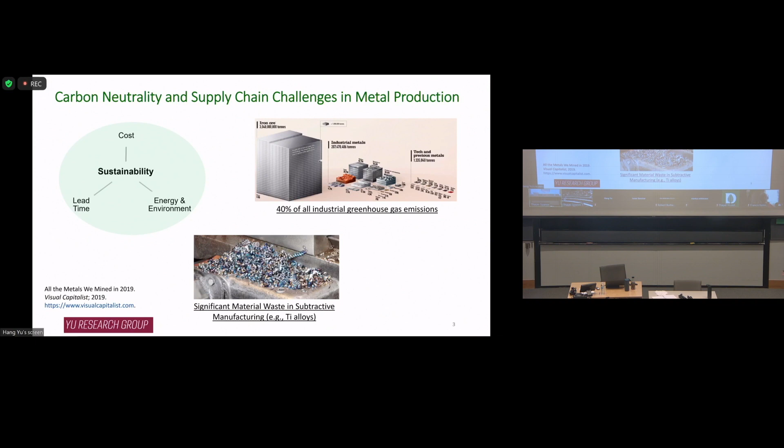Achieving those goals is not trivial at all. Metal production accounts for 40% of all industrial greenhouse gas emissions. And metal production can lead to significant material waste when you machine the material into the shape you want. One extreme example is titanium alloys. Folks at Boeing and Lockheed Martin start with billets of titanium alloy and machine them into the final parts.

During this process, up to 80-90% of the material can become waste. And metal production can also take a long time because we have insufficient supply of large dies for forging and castings. This can take up to a couple of years.

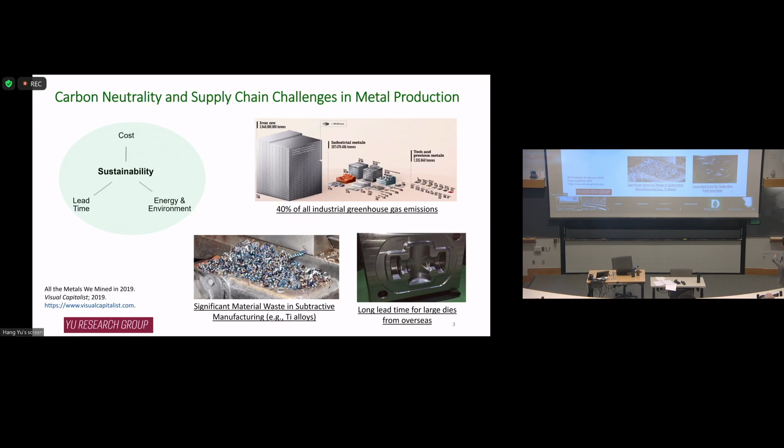So how can we address those problems? Let's look at the entire manufacturing chain of metals. You start from ores, you do extraction, purification, refining. You melt material, you add alloying elements, you cast them into ingots, you do thermomechanical processing like rolling, forging, extrusion, and then you do machining to get the final shape you want.

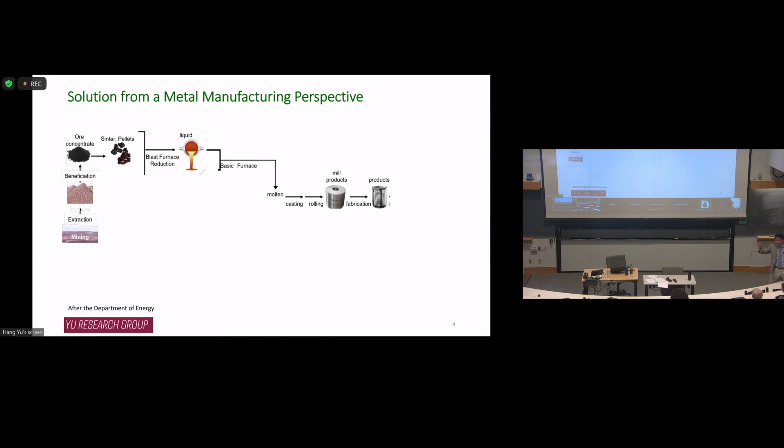This is a long manufacturing chain, but we can roughly divide it into two parts. The first part is primary processing and extraction—for folks from the field of mining, extractive metallurgy, chemical metallurgy, this is their focus. The second part is manufacturing, and for my group, as material engineers or mechanical engineers, we're more interested in the manufacturing side.

So we ask ourselves the question: what can we do to improve the sustainability of metal production from the manufacturing side? Look at this current manufacturing strategy—we have multiple manufacturing steps, a lot of energy consumption, and a lot of material waste.

So what if we can have another manufacturing strategy so we can simplify the manufacturing steps and reduce the material waste? What if we can promote decentralized and localized production of components, so we don't have to rely on more centralized, large manufacturing hubs? What if we can enable repair and remanufacturing, so when we have a large component with local damage, we don't have to throw it away—we can just do a repair, restore the geometry and properties, and extend the lifetime of the component? All these bullet points point to a new manufacturing paradigm: additive manufacturing.

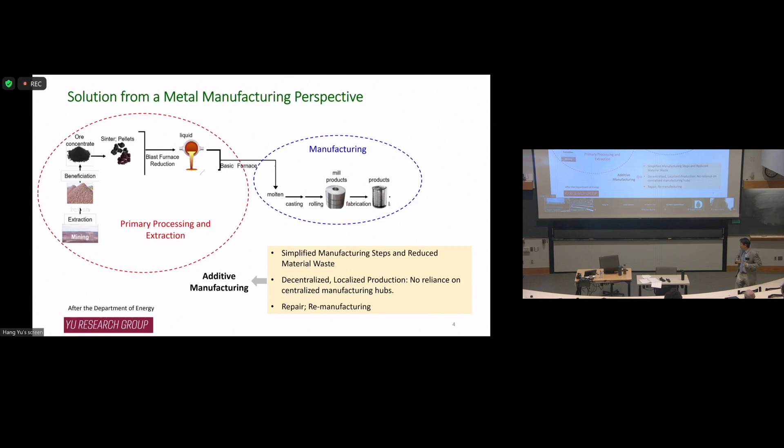So what is additive manufacturing? Traditionally, we do so-called subtractive manufacturing—you start with a big chunk of material, like a billet, and you remove material by machining to get a final shape.

Additive manufacturing is the opposite: you use building blocks, you add material, either layer by layer or voxel by voxel, to get a final shape. According to ASTM or ISO, there are 7 technologies for additive manufacturing, and based on those technologies, almost all types of material can be fabricated.

If you're interested in polymers, fused deposition modeling is very good for thermoplastics. And if you have a photocurable polymer, you can use material jetting or stereolithography.

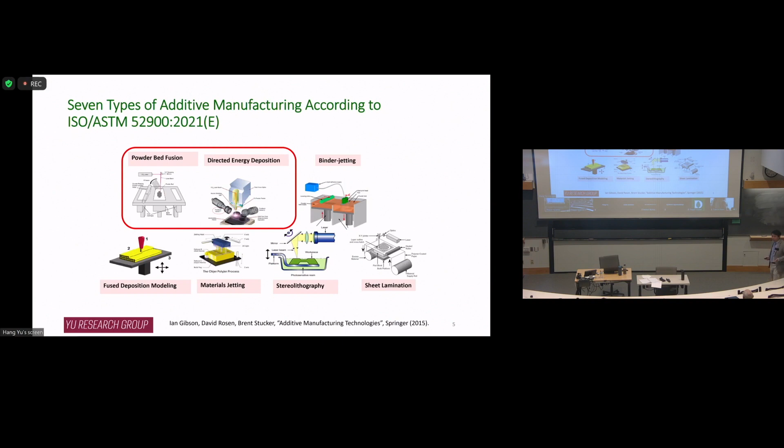If you want to print metals these days, I would say the most popular or mainstream approaches are the top two: powder bed fusion and directed energy deposition. Those two processes can be categorized under a common name, beam-based or fusion-based metal additive manufacturing.

In these cases, you have a high-energy beam—could be a laser beam, could be an electron beam—and you have a feedstock. Your high-energy beam selectively melts your feedstock, and as the beam moves away, your molten pool solidifies. The initial powder bonds together to become a solidified track, so your material pattern is based on the traveling path of your laser or electron beam. That's why it's called a beam-based process.

I have two examples here, small animations showing what's going on. The first one is powder bed fusion. That's a layer of powder, and you apply a laser—you can generate a pattern in this layer. Then you lay out another layer of powder and repeat this process with a different material pattern, depending on your G-code. Repeating this process layer by layer, you can make 3D components.

Of course, the material pattern in each layer does not need to be the same—that's why you make 3D components. But that's a very simple illustration. So this is powder bed fusion: you have a powder bed, and you apply a laser beam to generate a material pattern.

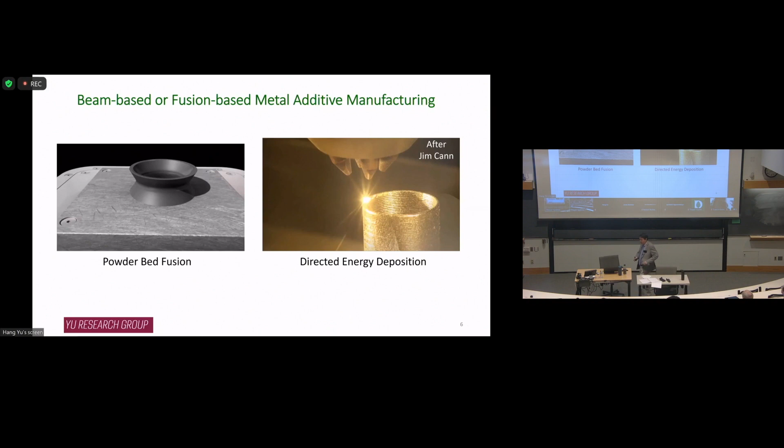There's another process here called directed energy deposition. In this case, you have multiple nozzles, and each nozzle supplies a stream of powder. At the same time, in the center there's an infrared laser applying energy to the location you want. So the material and energy come to the same space, the same place, at the same time, allowing you to deposit material to the locations you want.

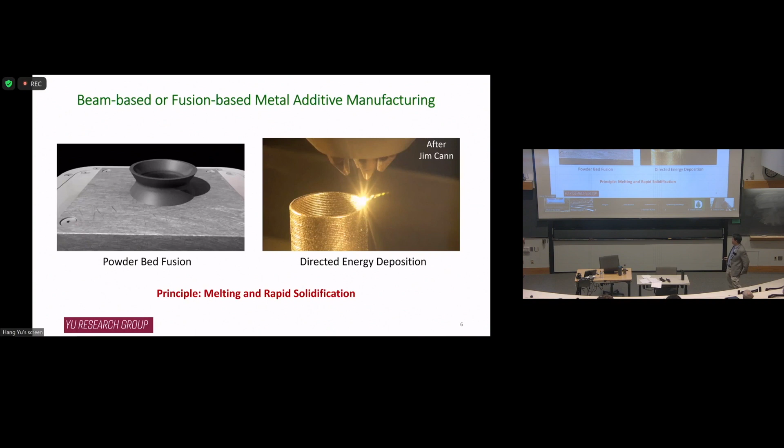The cool thing about this is you can manipulate your powder supply rate, so you can do in-situ alloying and functionally graded materials. So you see the two processes have very different configurations, but the underlying physical principle is the same—based on melting and rapid solidification. This is fusion-based additive manufacturing.

It's pretty powerful, but it's not perfect. We have a lot of challenges now. Because you have a small molten pool and rapid solidification, we always suffer from solidification porosity. With such a high thermal gradient, we suffer from high residual stress. And for some alloys, so-called non-weldable alloys, you have hot cracking problems.

And of course, this is a high-energy process—you need to melt the material, so you need to heat it above the melting temperature, requiring a lot of energy supply. Also, if your material isn't perfect and has porosity, you have to do post-processing like sintering or hot isostatic pressing to make it fully dense. The cost is high—powder is expensive, laser is expensive—and if you want high-quality parts, your powder needs to meet very stringent requirements on shape and size distribution.

So we wanted to solve problems in the area of sustainability, but now fusion-based additive manufacturing seems to give us more challenges, because of the high energy and quality concerns. So what do we do? Well, maybe we should think outside the box—not talk about additive anymore.

Let's think about traditional bulk-scale metal manufacturing. How do people do it? There are generally two categories: casting-based and thermomechanical processing-based. Casting-based is pretty good for large shapes that are very difficult to machine—you can cast to get large shapes. But if you want high quality and applications requiring high load-bearing capacity, you usually go to thermomechanical processing, because forging, rolling, and extrusion can help you get rid of cast porosity, modify the casting microstructure, and eventually lead to good mechanical properties. For example, airframes are usually based on thermomechanical processing.

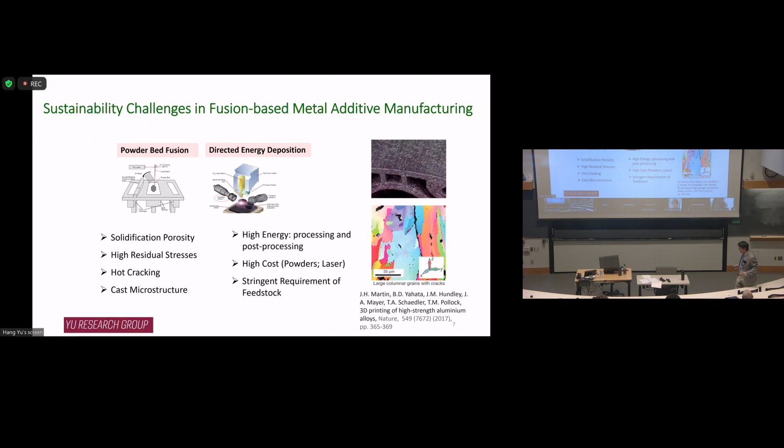So of course you have all the problems you already have in casting, but things are worse because you have such a small molten pool, the thermal gradient is high, and the cooling rate is high. So the question is, we know thermomechanical processing, or forging, can give good properties, but all the additive processes are based on casting. Can we have a forging-like additive manufacturing process rather than a casting-like one, and inherit all the advantages we have in forging, rolling, and extrusion?

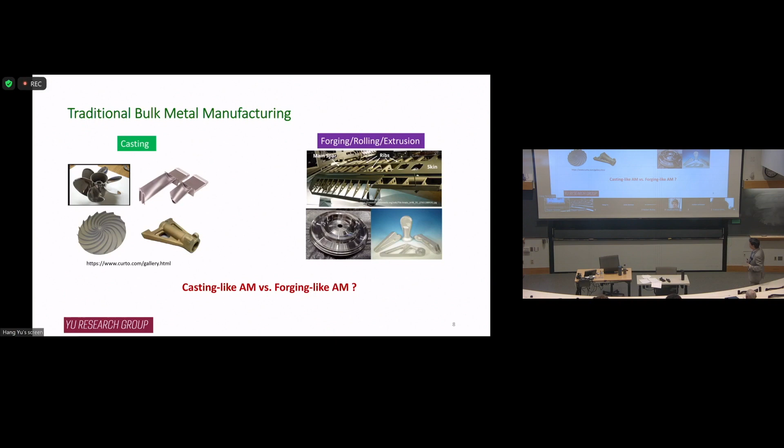That's a big question, and it motivated our group to do research over the last few years to figure out the answer. And the answer is yes, we can have a process based on thermomechanical processing rather than casting. This process is called additive friction stir deposition.

So I need to leverage some additional heating mechanism rather than simply heating the polymers. In this case, we leverage frictional heating. What's going on is I have my feeder rod going through my print head, and during deposition, both the feeder rod and the print head rotate very fast, usually a few hundred RPM.

As the feeder rod gets into contact with the substrate, there will be frictional heating there. The feeder material gets hot and softens. Then you apply compression, the material yields and is extruded out to the side. Once the feeder material becomes beneath the printer head, the printer head is also rotating, so it can impose compression and shear further to plasticize the material. It's like a smearing process.

During this process, the feedstock feeder material, which is in the form of a solid bar, will become fully plasticized because of compression and shear. But not just the feeder material - usually the surface layers of the substrate also get plastically deformed and mixed together with the feeder material. By doing this, you can get a really strong interface bonding.

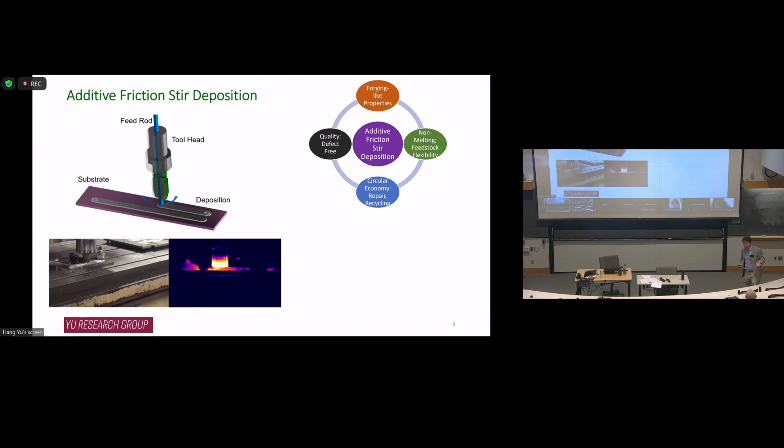I summarized four features. First is the quality - you can get fully dense material in the as-printed state. Second, properties - you can get forging-like mechanical properties in a convenient and inexpensive fashion. The third one is circular economy applications.

This process enables some cool applications like repair and recycling, which can further save energy. And the last one is the non-melting nature, low energy nature, and flexibility about the feedstock. So I'm going to show how these features can help us address some sustainability challenges, lower the cost, shorten lead time, and lower the energy consumption and CO2 emission.

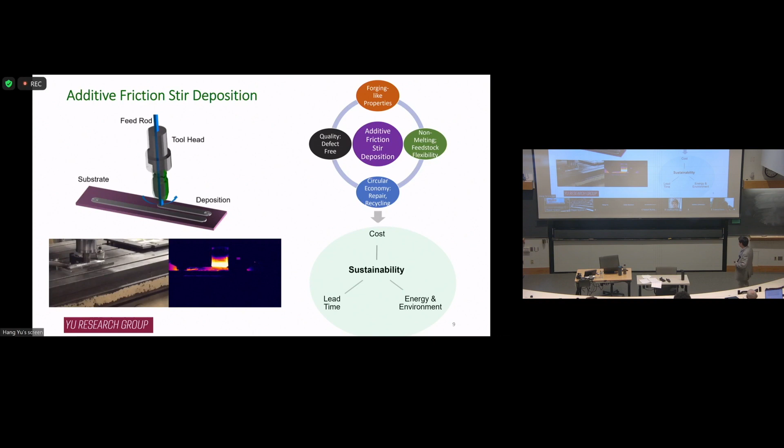So the first thing I'm going to talk about is the quality. I'm going to touch upon a few things: let's review the process fundamentals a little bit, thermal and deformation characteristics, and show you the full density in the as-deposited material and the interface bonding.

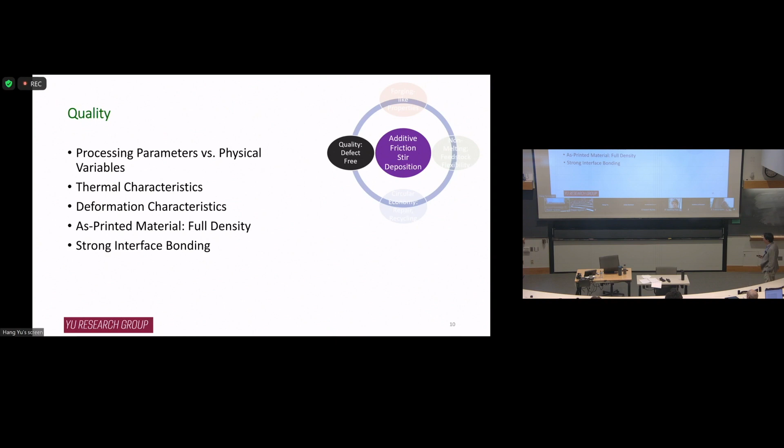Like all additive manufacturing processes, we have processing parameters. For a laser-based process, the laser power and scanning speed are the major parameters. In our case, one major parameter is the rotation rate - how fast you rotate your printing head - because that has a significant influence on heat generation. Another thing is F, the feed rate, how fast you feed your feedstock. Velocity, V, how fast you move your printing head. And finally, of course, the layer thickness. All these things affect the physical condition in this process.

That's the empirical processing parameters, but we're scientists, we want to go beyond the parameters to properties. We want some intermediate steps, going from parameters to physical conditions to microstructures to properties. So what's the physical conditions we care about? This is a deformation-based process, but also the material gets hot.

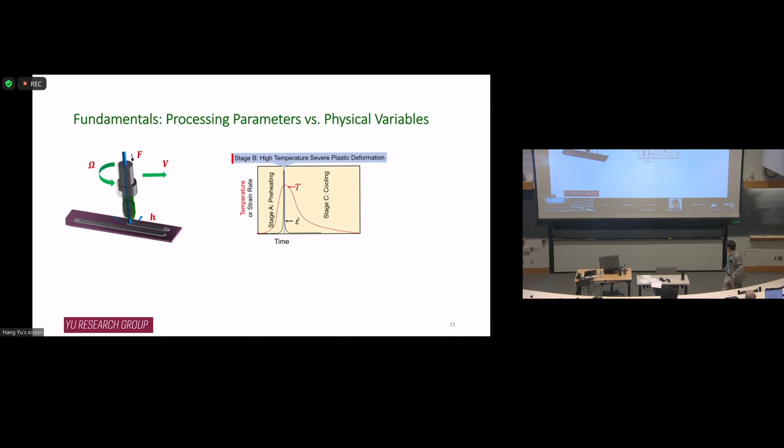So the two important physical variables we care about are temperature and strain rate. And this is not an isothermal process, so you have a history of temperature. What we care about essentially is a plot of temperature versus time, and another thing we care about is strain rate versus time. So that's the two important things we care about, and we try to understand a quantitative correlation between the empirical processing parameters and the physical variables.

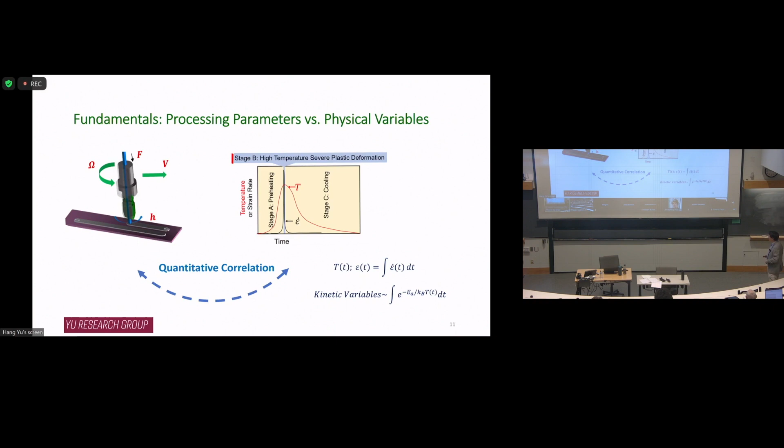From that, we can have some prediction of the kinetic variables and microstructure evolution, and from there, we can predict properties eventually. That's the hope. So in our lab, we have established a so-called integrated in-situ monitoring platform.

So we have multiple sensors. We have 2 thermal cameras. We can visualize the temperature of the tool and the temperature of the deposit material. We have multiple thermocouples embedded into a substrate. We have an optical microscope so I can visualize the material flow from the side. There are also built-in sensors, so you can get a sense of the torque and force evolution during the process. And of course there are other things like heat flux sensors or strain gauge sensors.

So from that, we can try to understand how the processing parameters affect the thermal characteristics. One example shown here is just from a thermal camera. This is the deposit material deposition zone, and this black thing is essentially my tool. I cover my tool to make sure there's no interference from the tool signal, so I just focus on the deposit material. Of course, we can measure the entire thermal field as a function of time.

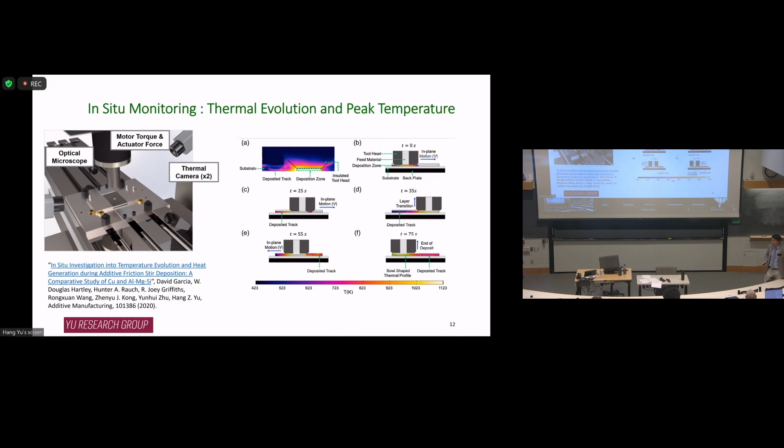This is an example of copper deposition. You see higher temperature of the material below the tool, and for the previously deposited material, the temperature gets lower because of cooling. We did this for a bunch of conditions.

Another thing we can do is instead of looking at the entire field, we just focus on one spot and monitor temperature change as a function of time. Then we can get a plot of temperature versus time. A typical curve would look like this. What's important here is we can extract some important thermal characteristics from this plot.

One important parameter, characteristic, is the highest temperature during the process, called peak temperature. Another thing is the exposure time - how long the material is under the elevated temperature. Of course, the heating rate and the cooling rate are also important for us. So we did some kind of parametric study.

Just one example shown here. Basically we're mapping inside the processing parameter space. We look at aluminum alloy 6061 and copper, and we linked the peak temperature with a so-called pseudo heat index, which is a function of my processing parameters. This is just an empirical relationship, and you can develop that for specific materials. For aluminum, we figured out omega squared divided by V is a pretty good empirical pseudo heat index, which is consistent with previous work on friction stir welding.

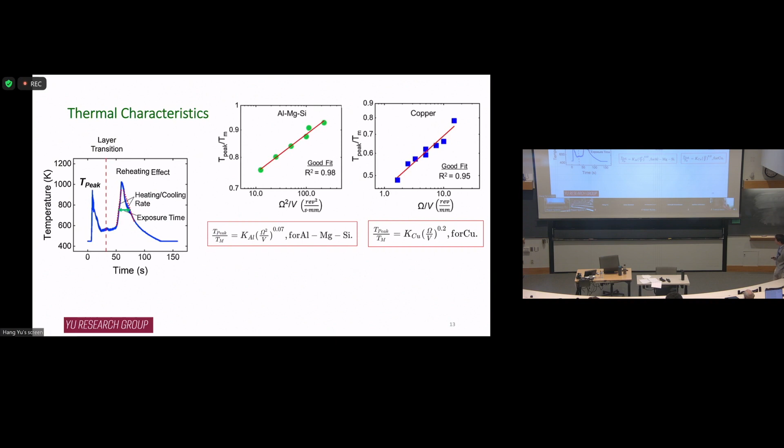For copper, we figured out omega divided by V is a better term, probably because copper has a very different contact state and material flow behavior. I think the take-home message is we can have a pretty extensive measurement of the thermal features during the process, and we generally can make the following conclusions: to ensure good deposition quality, the peak temperature needs to be high - below the melting temperature, but generally in the range of 50% to 90% of the melting temperature.

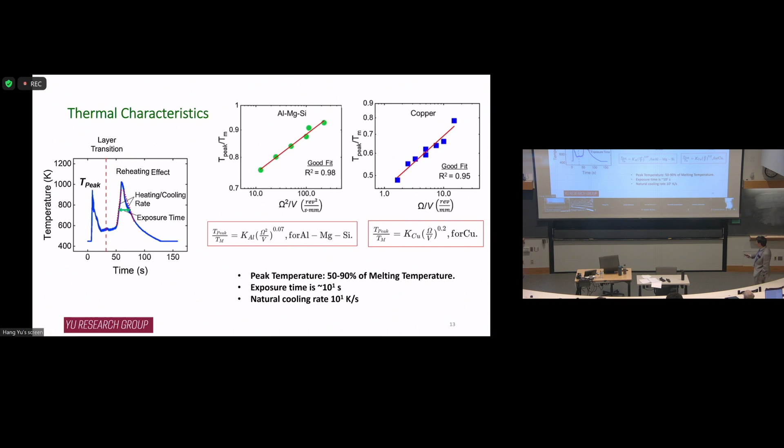The exposure time - the material being under elevated temperature - is usually on the order of 10 seconds for typical deposition. Of course, it depends on what material and what condition you want. The natural cooling rate is on the order of 10 to the 1 Kelvin per second, so it's pretty slow cooling compared to laser-based additive processes, which can easily give you 1,000 or 10,000 Kelvin per second. Of course, we can increase this with active cooling mechanisms.

So that's about thermal. What about deformation? This is a pretty fast deformation process - can we get some insights there? Well, we can try to be smart and do some innovative experiments. So one thing we did was a so-called tracer experiment.

Our feedstock is a rod. Now we don't use a homogeneous material, we use an engineered feedstock. So we have a rod where the base material is aluminum alloy 6061, which is an aluminum-magnesium-silicon-based alloy. We can drill a hole in the center and put another aluminum alloy, 2024, inside there. 2024 is an aluminum-copper alloy.

The two aluminum alloys have very similar thermomechanical properties, so they can flow together during the process. But they have a different composition, like a 5% difference in copper. So we can distinguish them using X-ray computed tomography. During deposition, we have this hybrid feedstock being deposited and stirred.

Suddenly we stop everything, like a stop-action experiment, trying to freeze the shape of the tracer material, and then we can do ex-situ characterization. In-situ imaging is pretty challenging in our lab. Maybe we will do it in the future, with some in-situ experiments in a synchrotron.

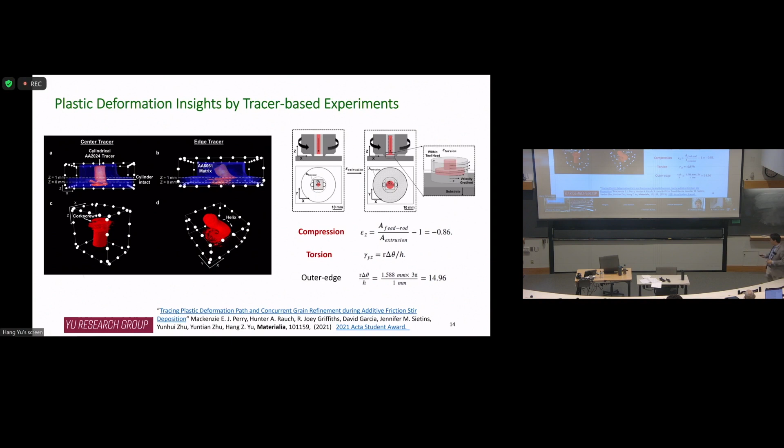That's something we can probe from experiments, which is quite limited essentially. We look at thermal behavior from an in-situ perspective. We look at deformation from stop-action experiments. We can do more than that, by doing some process modeling - of course, this is not trivial either.

One easy way to model this process is to leverage the framework of computational fluid dynamics, because the material is going to have extensive flow under the printhead, so we can model that as a fluid and get some insights there. Basically, the three key equations will be conservation of mass, conservation of momentum, and conservation of energy.

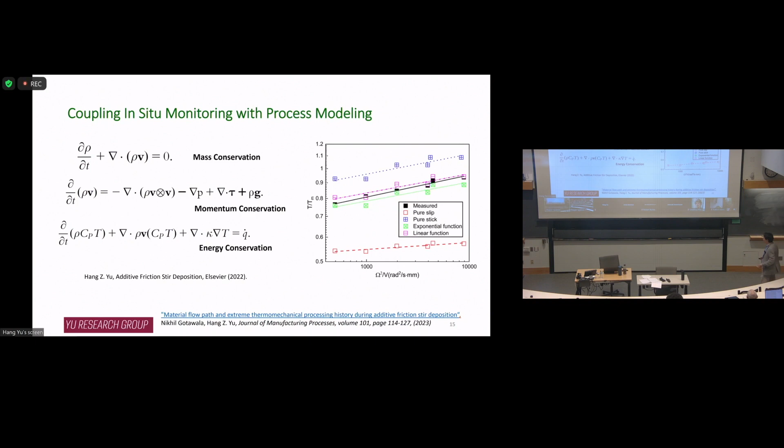So you can predict the steady state temperature and velocity distribution, and you can validate the prediction with some experiments we have. Once the modeling has been validated, we can get some more insights that cannot be obtained from experiments. One is the material flow path - we conclude that the material will go down, and then you have kind of a spiral shape flow path.

Along the material flow path, we can record the temperature, because we know the steady state temperature distribution, and now we know the flow path. We can do a kind of particle tracking, so we can get a history of the temperature and the history of the strain rate as well.

This is typically what we get. The top one is a strain rate history. Initially, once the material comes out of the channel, there's a high strain rate - usually it's a short period of time, we're talking a second or so - and then the strain rate will decrease.

For temperature, definitely the material, as long as it's below the printhead, it's experiencing pretty high temperature. So there's an extended period of time that the material is under elevated temperatures, and this is consistent with what we find from the in-situ measurement as well.

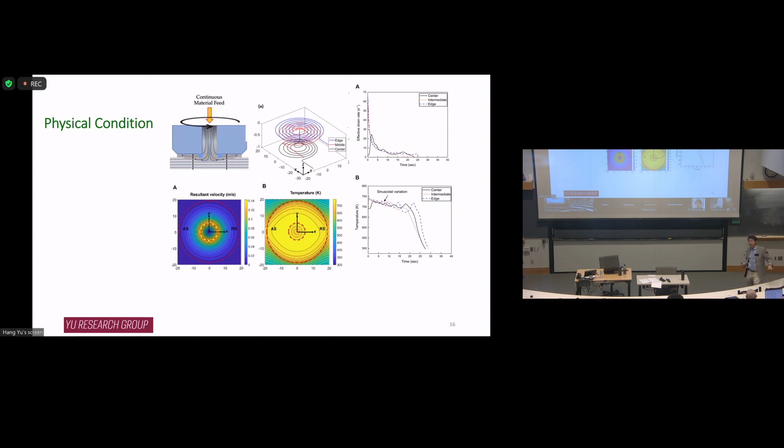The take-home message overall from the in-situ monitoring experiments and from the process modeling is that this is a rapid and severe plastic deformation process in nature. It happens at high temperatures, below the melting temperature, but the thermomechanical history is pretty complex - it's not a constant temperature, it's not a constant strain rate.

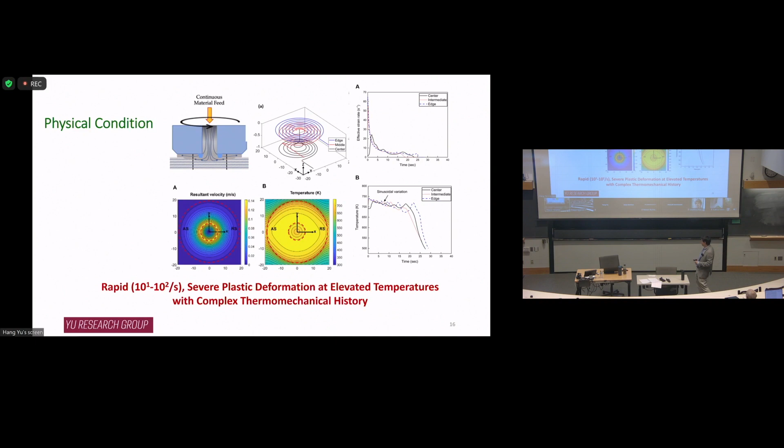So this is some fundamentals of the process. What about the quality? Because we have intensive material flow, because we have compression and shear force there, essentially what we get from the as-printed state is a fully dense material. There's no porosity - we don't have to worry about porosity in the bulk of the deposition. That is a big improvement compared to the fusion-based process because you have solidification porosity, you have keyhole formation. So that's one unique advantage of this process: full density.

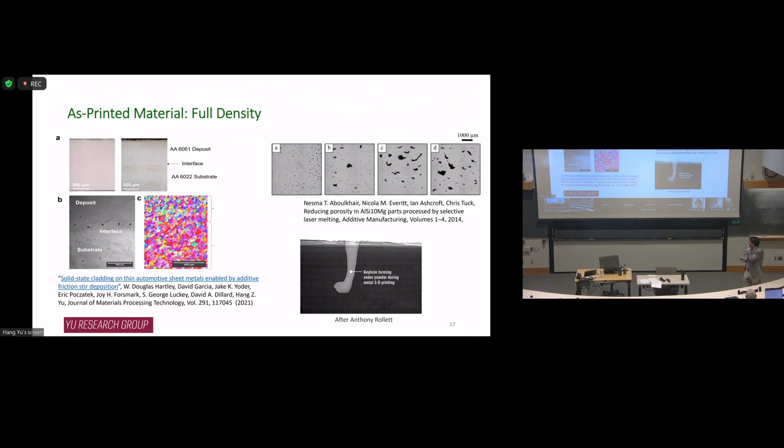Another advantage is the interface. This is again showing an example of an AM-printed material. We're trying to quantify the interface strength of the deposition. So we start with a very thick substrate of 6061 aluminum alloy.

I think this is about more than a 5 centimeter thick substrate. Also, we deposit hundreds of layers to get a very thick deposition. And then we cut a beam in the center. So I have a beam in the center here, right? So now my interface becomes the center of the beam.

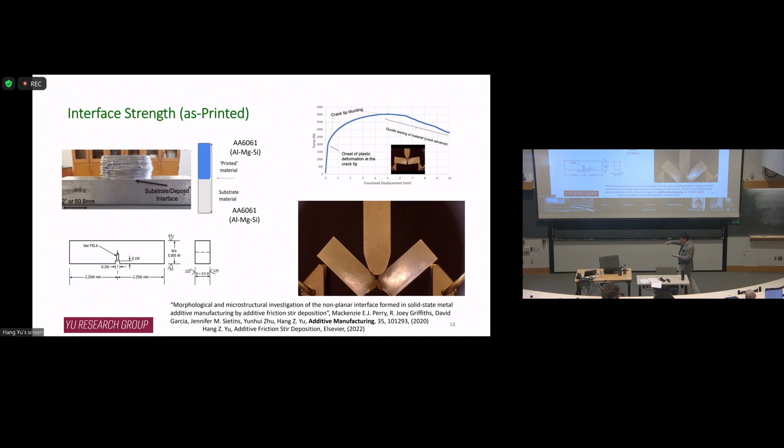But from that, we can semi-quantitatively say, or qualitatively say, that my interface is pretty strong. So that's a really good thing about this, because the mixing and the cold plastic deformation gives a good interface, and also we have fully dense deposition.

Of course, we have limitations as well. So what's our limitation? This is a deformation-based process. As I explained earlier, I have a material getting yielded and being extruded to the side. So once the material is on the side, especially at the edge of the deposition track, the compression is low, and there's not much mixing between the deposit material and the substrate. So the edge is of low quality, and sometimes you get pretty rough edges.

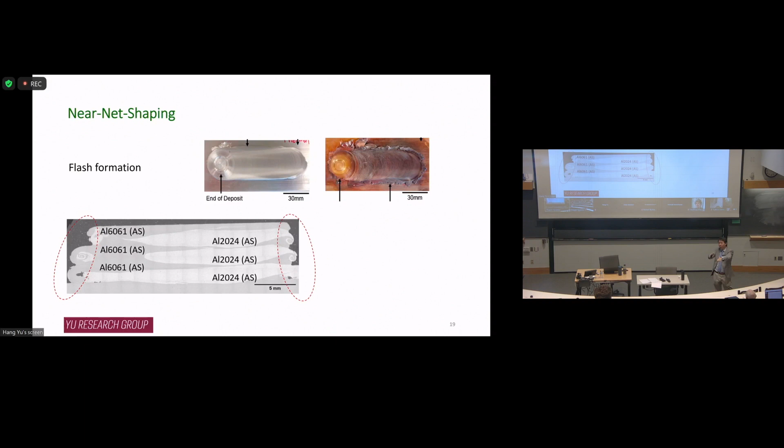So we have to remove that material. Those edges are called flash. That's why this process is better termed near-net shaping additive manufacturing, because you have to remove some of the rough edges. When you deposit a large pattern with multiple tracks, you can try to reduce this problem by overlapping your tracks. But in the end, the outer edges still need to be machined off.

But that is, of course, much less significant compared to the traditional subtractive manufacturing process. Compared to the laser-based process, I think it's better to term this technology a near-net shaping process. So that's the first feature I talked about. I think the take-home message is full density, good interface bonding, and near-net shaping.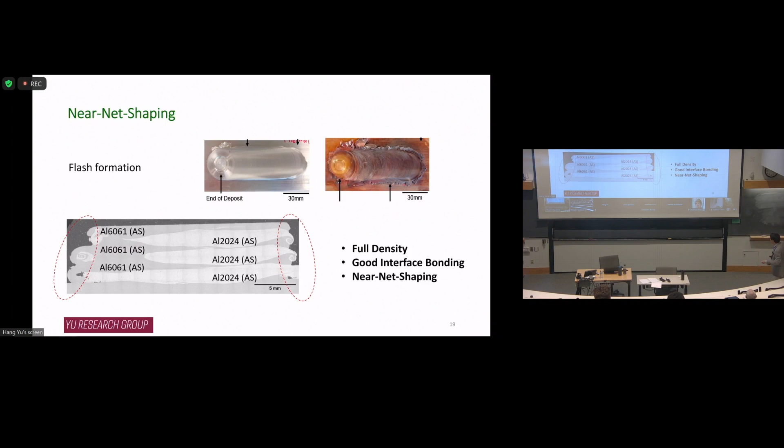The second feature I want to talk about is the forging-like mechanical properties. I'm going to talk about the microstructure formation and compare the difference between a laser-based additive manufacturing process versus additive friction stir deposition. I'm also going to show some examples of the properties you can get from 3 critical aerospace alloys. If you talk to people from the aerospace industry or Navy, they only care about 3 alloys: aluminum 7075, aluminum 7050, and Ti64. So we're going to show you can get good properties using this process for these materials.

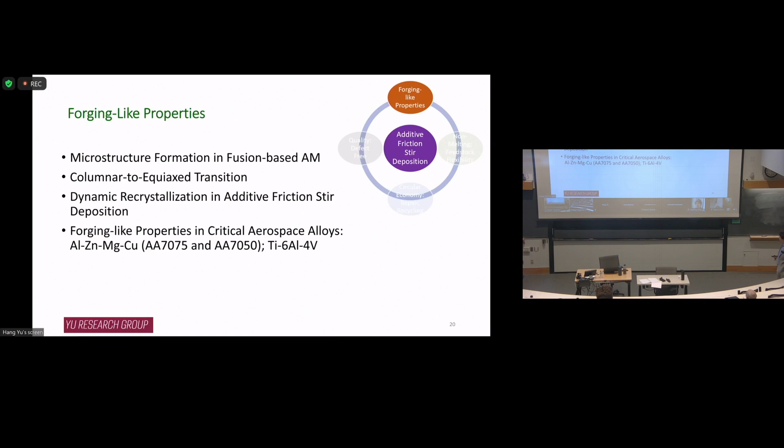So let's first think about how the microstructure forms in the fusion-based AM process. You have a molten pool and a substrate, and your interface provides heterogeneous nucleation sites. Heterogeneous nucleation is much more efficient than homogeneous nucleation, so nucleation will happen at this interface. The newly solidified material will adopt the crystal structure and the crystallographic orientation of the substrate. Therefore, you're going to have grains grow along the build direction, and you get some columnar grains like this.

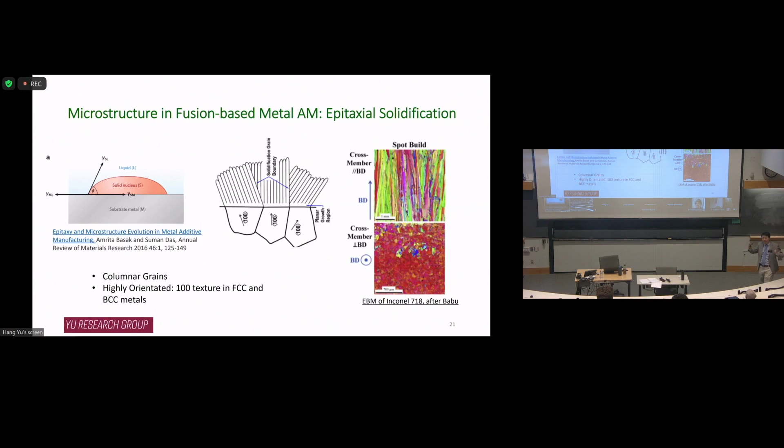Also, from knowledge of welding, we know for cubic material, 001 is an easy growth direction. So in the end, you always have a strong 100 texture. Naturally, without doing anything, you get columnar grains with a 100 texture. That's not always what you want. A lot of the time you want a more random texture, because you want isotropic mechanical properties. So there's a lot of effort trying to convert from columnar grains to equiaxed grains.

Actually, that's not new knowledge. If you look at welding literature, people already figured it out. There are two parameters that are important: one is the thermal gradient G, the other is the solidification rate R.

If you can have a relatively high R and low G, you can promote undercooling, giving a better chance of homogeneous nucleation inside the molten pool. By doing that, you can get equiaxed grains rather than columnar grains.

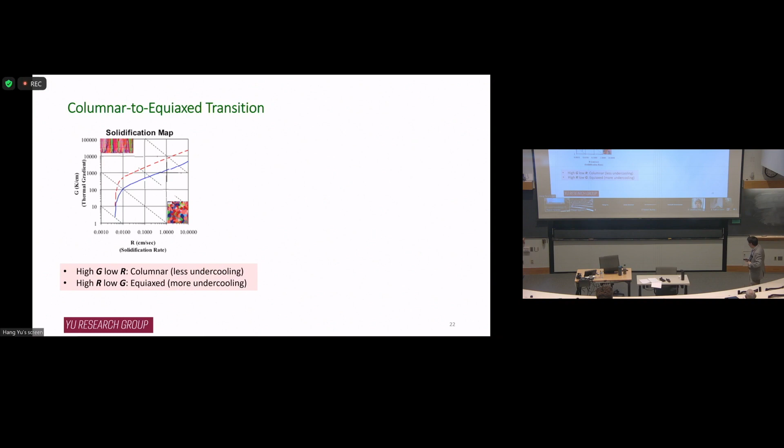This has been demonstrated by a National Lab a few years ago. They did E-beam additive manufacturing, I think of nickel alloy, to show that you can manipulate processing parameters to control the G/R ratio, so you can get some areas with columnar grains and some with equiaxed grains.

The red means a strong 100 texture, and that's columnar grains. A more greenish or non-red color is more like equiaxed grains with random texture. They can control that, so they can make a pattern like a DOE, showing that.

Another way to do it, demonstrated by folks at UCLA, UCSB, and HRL, is to add nanoparticles into your feedstock. Those nanoparticles have a high melting temperature and can serve as heterogeneous nucleation sites inside the molten pool, so you still have heterogeneous nucleation, but inside the molten pool, giving an equiaxed grain structure. That's what people have done in fusion-based additive manufacturing to control microstructure.

In our case, we don't have to worry too much about that, because this is a deformation process at high temperatures. We have dynamic recrystallization, and depending on your material properties, you may have two types: so-called discontinuous dynamic recrystallization versus continuous dynamic recrystallization.

Discontinuous recrystallization is the more traditional concept. You have a lot of dislocations, and in a region you get a dislocation-free grain that can grow to consume neighboring grains to reduce stored energy. Then this new clean grain becomes big enough and gets more dislocations inside, and you repeat this process in a cyclic fashion. That's dynamic recrystallization in a discontinuous way.

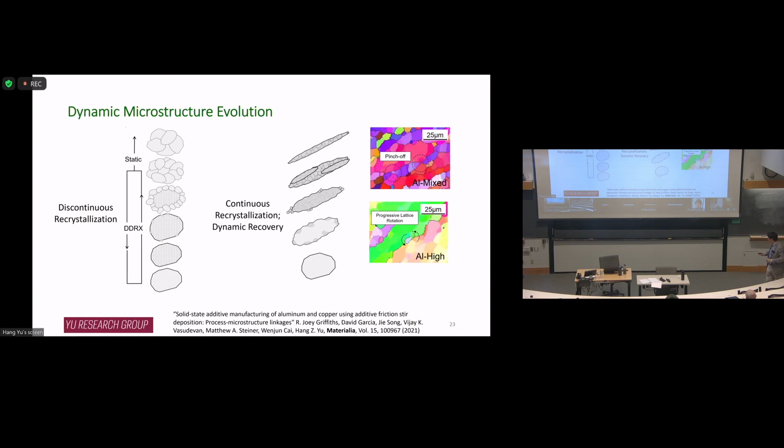If you remember, I talked about stop-action experiments. We try to freeze the shape of the tracer, but we can also freeze the microstructure, the grain structure. If we do that, we can map microstructure evolution along the flow path to figure out the mechanism better. This is an example of 2024 aluminum, which is a copper-based aluminum alloy.

This is my base material microstructure. This is Area 1, at the top in the print head, and you see there's not much difference, so there's not much going on.

Area 2 is still in the channel, but right before the material comes out of the channel. If you look at the microstructure, there's a little bit going on, but not much.

Area 3 is right below the channel, so the material just came out. You see the microstructure has significant change. I got elongated and thin grains, and I can see a lot of gradient in the orientation angle inside the grains. I start to form subgrain structures.

Areas 4 and 5, basically after that, I already get dynamic recrystallization complete. I got equiaxed and smaller grain size.

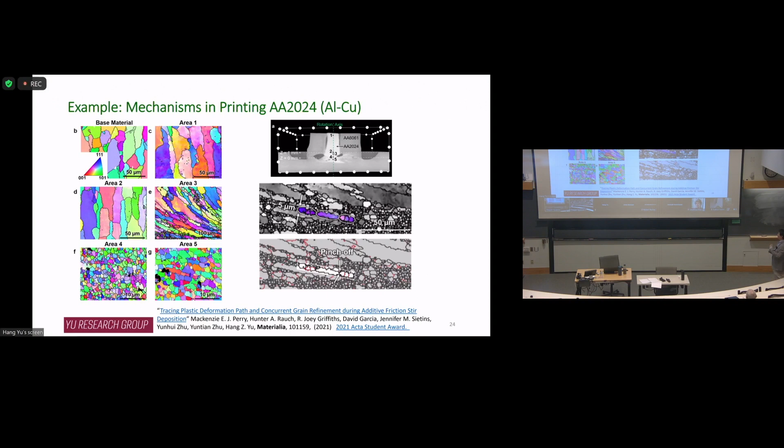If you zoom in on Area 3, you definitely see more evidence showing this is continuous dynamic recrystallization. You have subgrains, and essentially the thickness of the elongated grain becomes the final grain size. That's a mechanism specifically called geometric dynamic recrystallization. So that's a piece of evidence showing that for some aluminum alloys, you have geometric dynamic recrystallization.

But generally, for all the materials we play with, we see some dynamic recrystallization, though it could be a different mechanism. For all the aluminum alloys we play with, like 6061, 2024, 7075, it's all continuous dynamic recrystallization. For copper, we see signs of discontinuous recrystallization.

For titanium alloy, like Ti64, it's more complicated because the deposition temperature is above the beta transus. Essentially, the material transforms to beta phase, and you have dynamic recrystallization to form equiaxed beta grains. During cooling, the alpha phase forms inside the prior beta grains, and eventually you get this lamellar structure. But generally, you get some phase evolution or grain refinement in the deposited material.

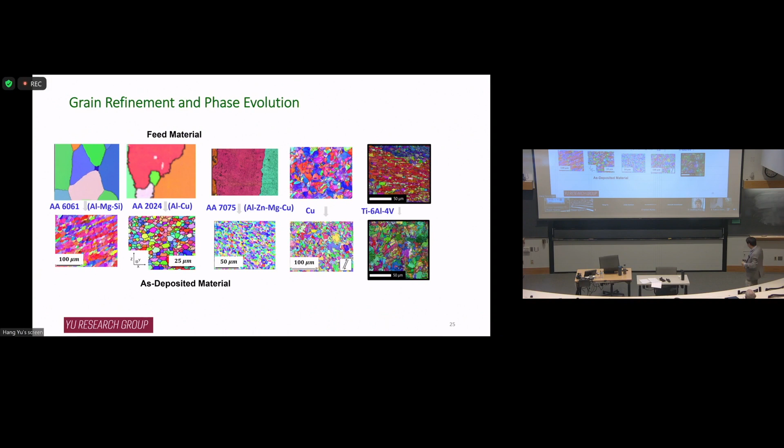So that's about microstructure evolution. How about mechanical properties? How does our process compare to fusion-based processes in terms of giving you good properties?

One example I'm showing here is a high-strength aerospace aluminum alloy, a 7000 series aluminum alloy. You have a hot cracking problem in the fusion-based process, so people in fusion-based additive manufacturing add nanoparticles to address this. But for us, things are much easier.

We just use engineered alloy as our feed material, a deposit material, fully dense. Then we do a solution treatment and aging to get the right temper. We do tension testing, and we can get comparable mechanical properties to a forging bar or rod material.

Another example is very similar but slightly different composition, 7050. Here the story is similar—you don't have to change any chemistry or composition or add nanoparticles. Just use the engineering feedstock and you can get good properties.

Here I'm trying to show you a difference between the as-printed material and the aged material. The as-printed material has low strength because there's complex precipitate evolution during the process. During cooling, there are overgrown precipitates—much larger than the ideal case that would give you peak strength.

But after heat treatment, you can get forging-like properties. So we can make a kind of Ashby plot and show that this process gives you properties falling in the regime of a forging standard.

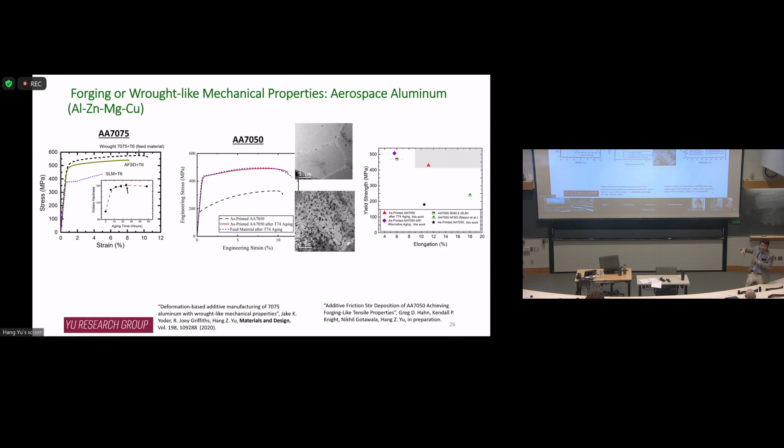I think the take-home message is this process, when we talk about high-strength alloys like aluminum aerospace alloys, gives you a cheap and convenient solution to achieve good mechanical properties. This is the advantage, especially for high-strength aerospace-grade aluminum alloys.

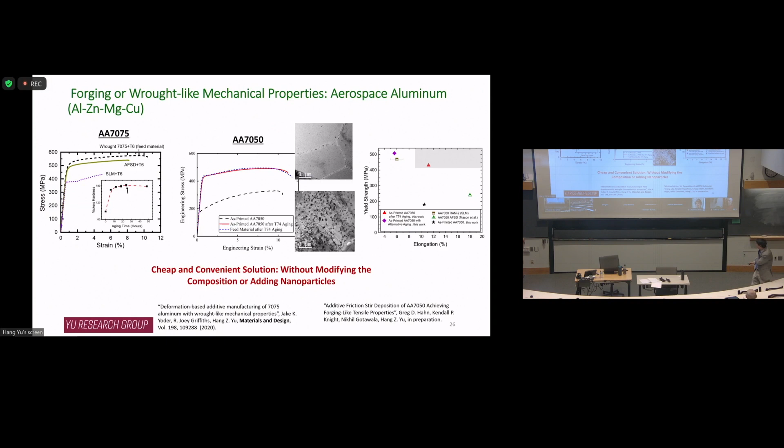We've also demonstrated something similar in Ti-64. This curve is as-printed material, because with Ti-64 you don't have to do aging to get precipitates—it's essentially a two-phase alloy. We show you can get similar mechanical properties in-plane and out-of-plane. That's pretty remarkable, and it also falls into the regime of a forging standard.

We also try to understand how strength depends on the prior beta grain size, and the relationship there. Again, the message I want to give is that this process gives you a convenient pathway to achieve excellent mechanical properties compared to the fusion-based additive process.

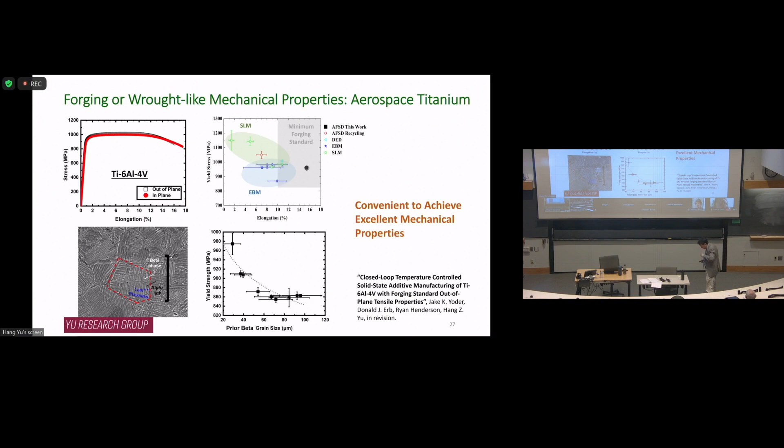The third thing I want to briefly talk about is applications. What can we do using this process? Of course it's additive manufacturing, but we can do more than just manufacturing bulk-scale components. We can do recycling and upcycling, repair, and also try some austere conditions.

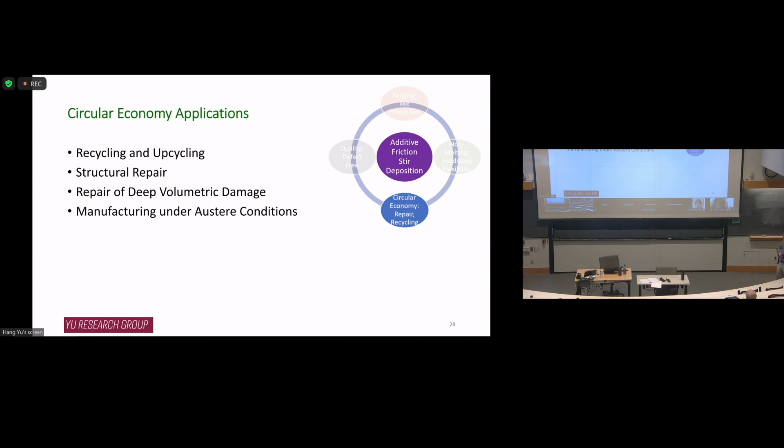So this is one example. We got some machine chips from Nissan—cast aluminum alloy machine chips rich in silicon. We just compress them into the same dimension as our feedstock, so it's a porous compact with a density of 68%.

For this case, we don't have to do any sintering. We just have a porous compact. We insert that into the channel and do a deposition, and it turns out we can get a fully dense material.

Even though the feedstock is not fully dense, this is because we have sufficient material flow, compression, and shear—there's some in-situ consolidation process. After removing the rough edges we get a block, and we can fabricate a tensile bar to test the mechanical properties.

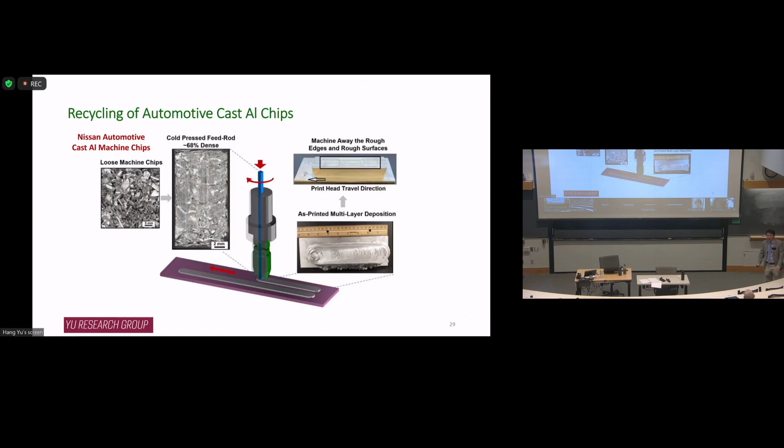This is as-printed material, no heat treatment. This is what we get. The red is the original bulk-scale cast aluminum alloy—it's brittle because you put a lot of silicon there to improve castability. The large silicon particles kill the ductility.

But after deposition, our material becomes more ductile—you see significant strain hardening. So why is that? If you examine the microstructure and compare the feedstock material, which is machine chips, versus the deposited material, you'll see the secret.

We have grain structure change due to dynamic recrystallization. But more importantly, we also have a second phase particle change. In the original cast aluminum alloy, I had large, elongated silicon particles, as well as iron-based intermetallics. But during the stir process, because of the shear force, I'm actually breaking those large particles into small pieces, and they become more spherical and well dispersed.

So now this microstructure gives me better ductility and also some strain hardening behavior. Overall, what I did was not just consolidate the material—at the same time, I changed the microstructure during deposition so I could improve the ductility.

We showed this work to the Nissan people, and they said, oh yeah, you should call this upcycling rather than recycling, because you improve the ductility and energy dissipation.

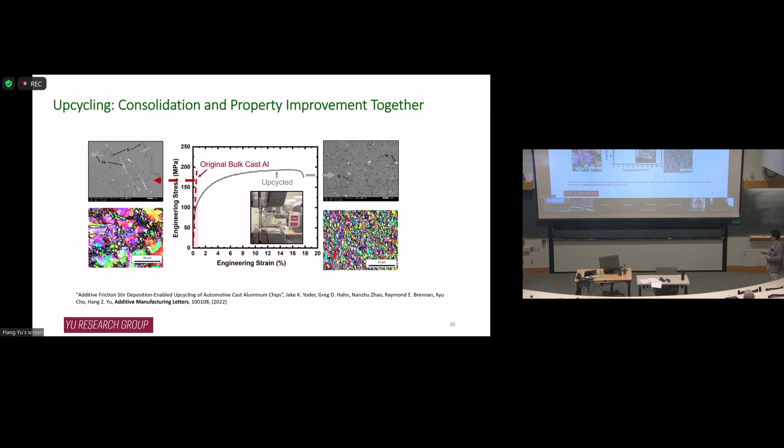Another application is repair. When you have large metal components, you can have local damage like surface divots, trenches, missing features, or cracks. What do you do with them? You want to repair them, rather than just throw away a big component with local damage.

How do you repair that? In this case, we want to do structural repair as opposed to so-called cosmetic repair. Structural repair means I want to repair the geometry and also get good mechanical properties. We surveyed different repair technologies and divided them into four quadrants, depending on whether melting happens or not, and whether the technology is additive or not. Our conclusion is we want to be in quadrant 3: a solid state, non-melting process, but additive.

There are two options essentially at this moment: one is additive friction stir deposition, the technology I'm talking about, the other is cold spray. For your background, Navy has invested a lot of funding in cold spray over the last decade or so. Cold spray has demonstrated great success for surface repair, but for deep holes or deep volumetric damage, additive friction stir deposition is your choice.

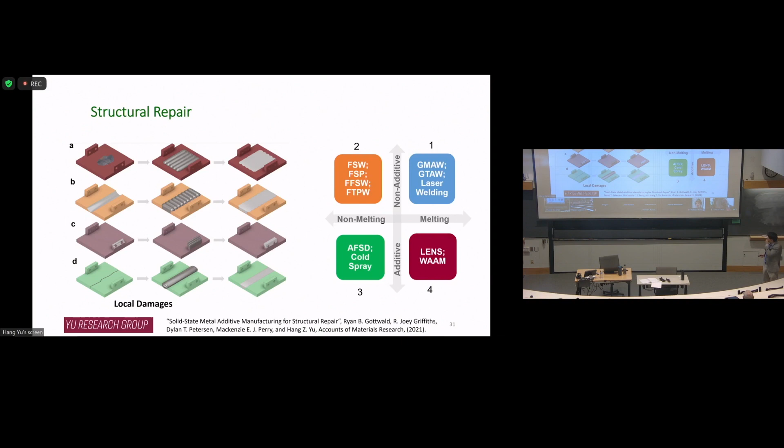So here's an example. This is a through-thickness hole of a quarter inch aluminum alloy plate. Our process demonstrates that you can actually deposit material into the hole. Not just deposit material—essentially you're pushing the material into the hole. There's going to be mixing and interaction between the deposited material and the sidewall. By doing this, you can get good interface bonding. We show that for a quarter inch thick plate, through-thickness hole, we can actually fully fill that. You can see on the backside the material is fully filled.

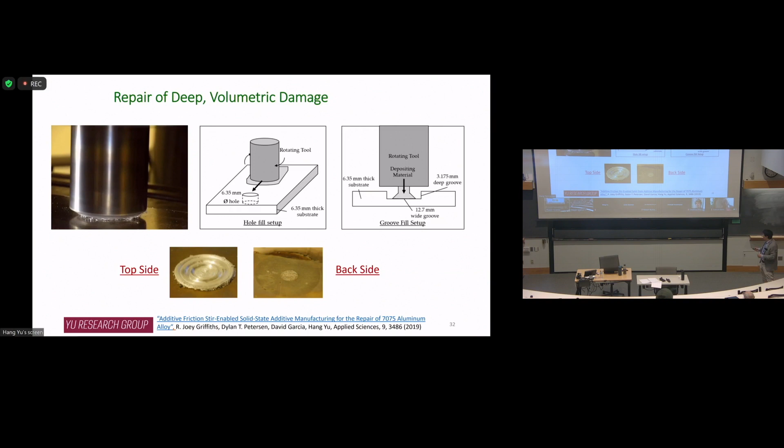And we showed that to some Navy people in 2019, and they said, okay, we have actually a project for you to think about. Turns out Navy suffers from a corroded hole problem for the long term. The big airframes have a lot of holes for fasteners, and during service you get corrosion all the time. The corroded material is surrounding the hole, so you have to remove the material and your hole becomes bigger. The fastener won't fit. How do you address this?

The current strategy is essentially to fabricate a bushing structure, like a ring, and mechanically insert it. The airframe is made of aluminum 7050, and the ring is stainless steel. Making the ring is also time-consuming and expensive. But also, you don't have bonding between them—it's just a mechanical interlocking, and you have a sharp interface. So that's another option, but not a great one.

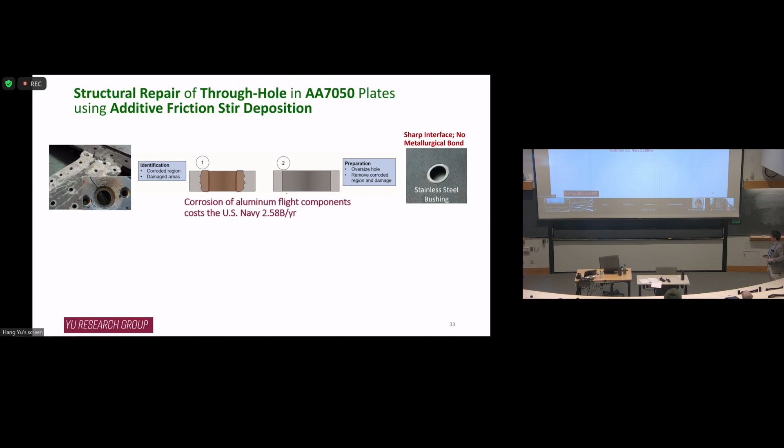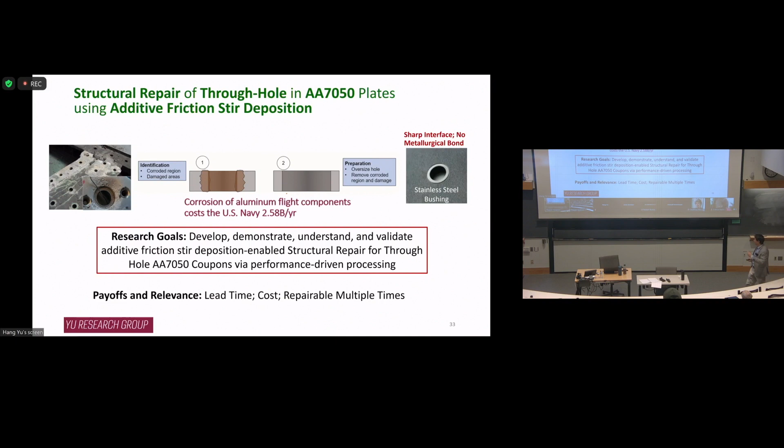This project is based on the idea that since we can now fully fill a hole, maybe we can apply that to address this problem. If we can be successful, we can shorten lead time, reduce cost, and possibly repair this multiple times.

So a quick illustration of what we did: we started with a larger hole after removing the corroded material, and then we fully filled the hole using additive friction stir deposition. We needed to develop some recipe—some deposition processing recipe, deposition path—to fully fill the hole and make sure there's no defect or kissing bond like this. Then we can remove the excess material and re-drill to the original hole size.

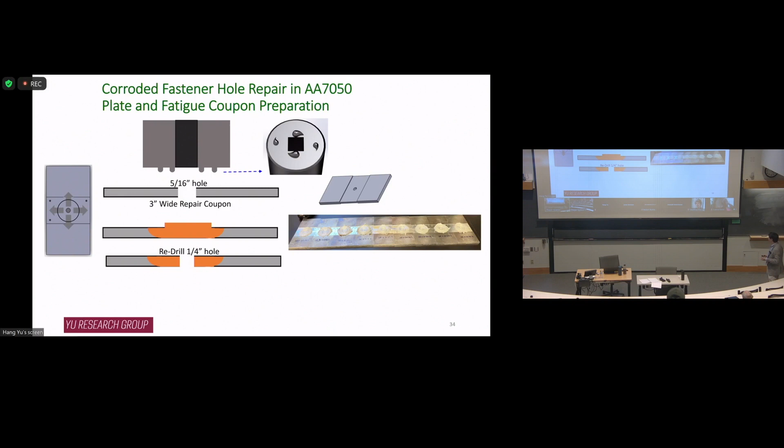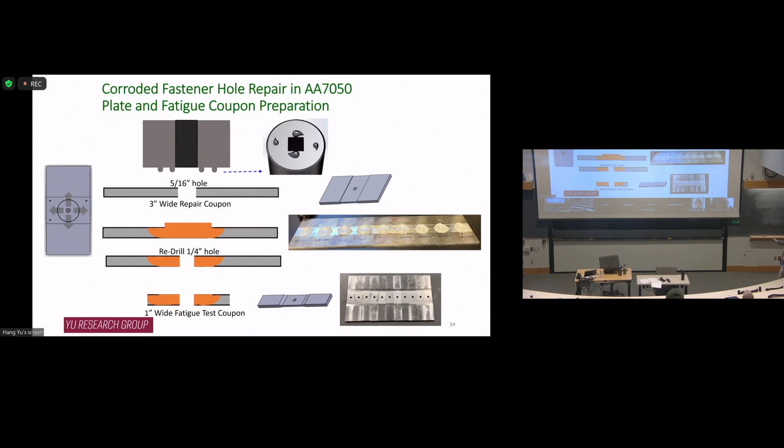Eventually we can fabricate them into fatigue testing coupons. And of course, for fatigue testing we need to take care of the statistics—we have to make tons of coupons to make sure everything is consistent. These are some examples we made: this is after deposition, so you have small caps on top, then we remove the excess material and re-drill to the original hole size. I got 10 plus fatigue coupons I can test.

I'm not allowed to show you all the detailed data, the curves, but I can give you a qualitative description of what's going on. When you have pristine material and do fatigue testing with a hole, eventually your crack will propagate in the horizontal direction because of the tensile stress. If you do a good repair, like this, using the recipe we developed, we also get the same failure mode.

So we can actually get comparable or even better fatigue performance than the base material, because we changed not just the repair geometry, but also the microstructure of the deposited material. I don't have time to go into detail, but it relates to the crack initiation and crack propagation mechanisms. Okay, so if you don't do a good repair, you're going to fail at the repair region.

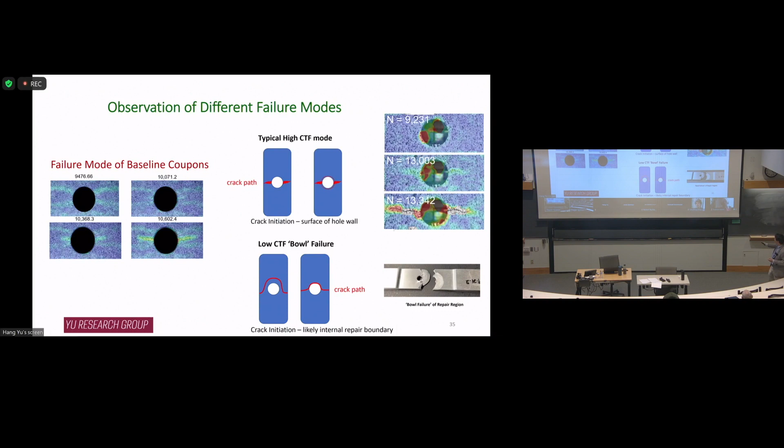You get a bowl shape. But I think what we can say is we have developed a recipe, and we can get good repair performance.

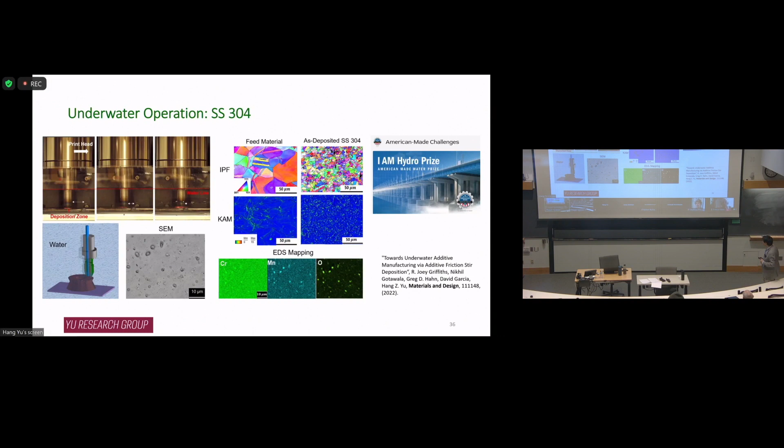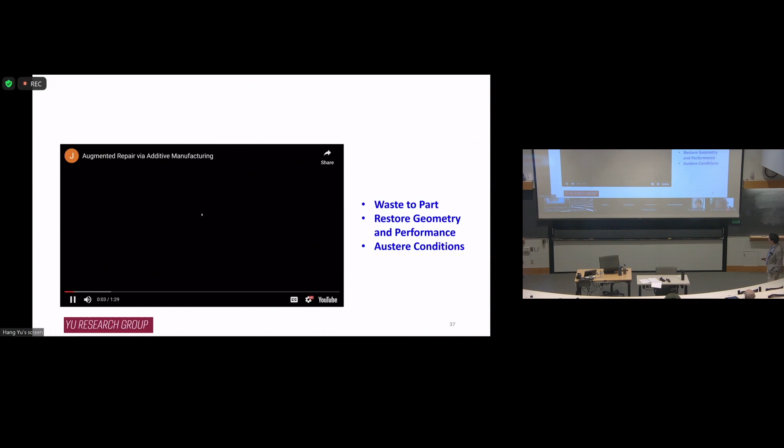Last thing I want to show you quickly is this process can be applied underwater. We showed this possibility and won an American-Made Challenge by DOE, a prize together with my students. I used to have a video to show you, but I think I'm running out of time, so I'll just skip this. I think the take-home message is we can go from waste to part. We can restore geometry and performance, and we can apply this to some austere conditions.

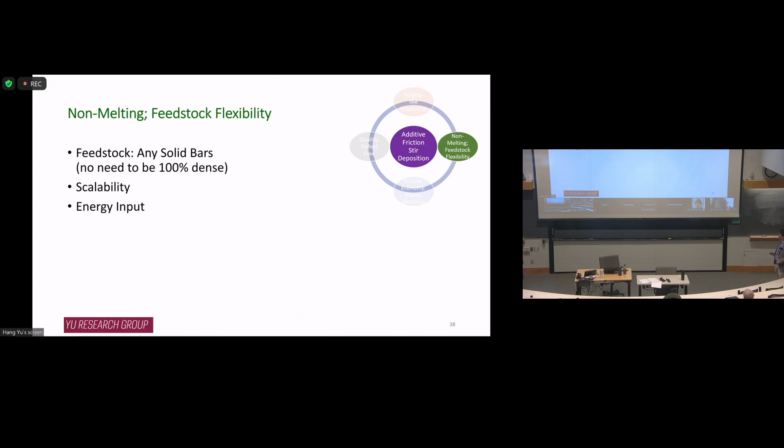The last thing, I have three slides left. Let's go quickly. So what's the last feature here? It's a non-melting process, right? So it's low energy. But also, I'm so flexible about the feedstock, you see, we can use any solid bar, even recycled material. And also, I want to show you this is a scalable process, and talk about energy input.

So in fusion-based additive processes, you need powder, and powder is expensive, it takes time and money to make high-quality powders. For our case, we don't have to. If I have a foundry, cast me a solid bar, and I will do the printing for you. So it's fully compatible with casting.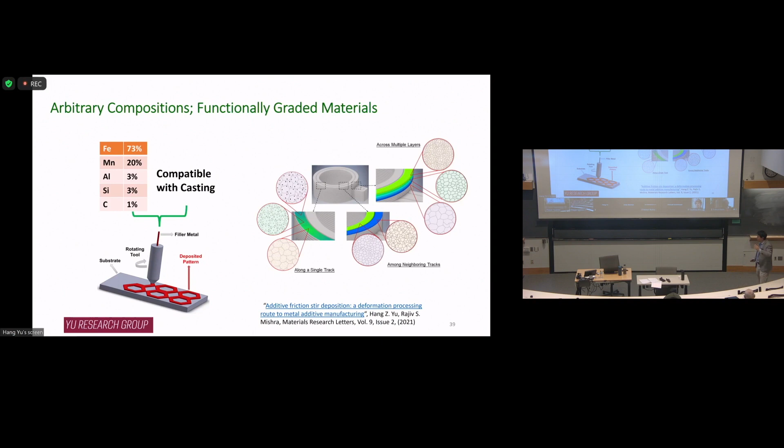We can try different alloys of interest, we can arbitrarily change the composition and play with that, you don't have to make a powder first. And also, because of the deformation process nature, you can control the grain size, control the precipitates. By controlling the processing conditions, you can make functionally graded material in the future as well.

This process is currently designed for large scale. So the feedstock I'm talking about has a dimension like a centimeter by centimeter. Right, so it's large, you're not going to make an Eiffel Tower this big using this process, you're going to make big things, right. So there's a few examples, and those are really meter scale.

One thing I want to mention is the Army is really interested in this, and they are trying to build, I think they're already finished building, the world's largest metal 3D printer in Rock Island Arsenal, Illinois. So the idea is very simple, using the same print head we have, but they build a huge gantry so you can move the print head X, Y, Z. You can get 30 feet long, 36 feet long, 25 feet wide, and 13 feet tall. So we're involved in some projects with them, trying to figure out cool projects for the industry.

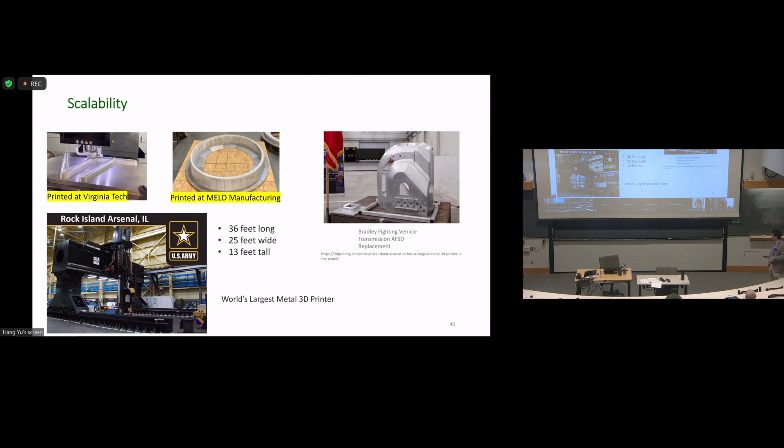So last thing I want to talk about is energy. Turns out energy input is relatively low. So the vertical axis is essentially the energy cost per mass, we're talking about kWh per kilogram. Turns out if you have a relatively low rate, you can be in a regime of 4 kWh per kilogram, but if you increase deposition rate, you can lower the energy input per mass. And that's very impressive compared to traditional manufacturing processes like ingot casting, extrusion, or shape casting.

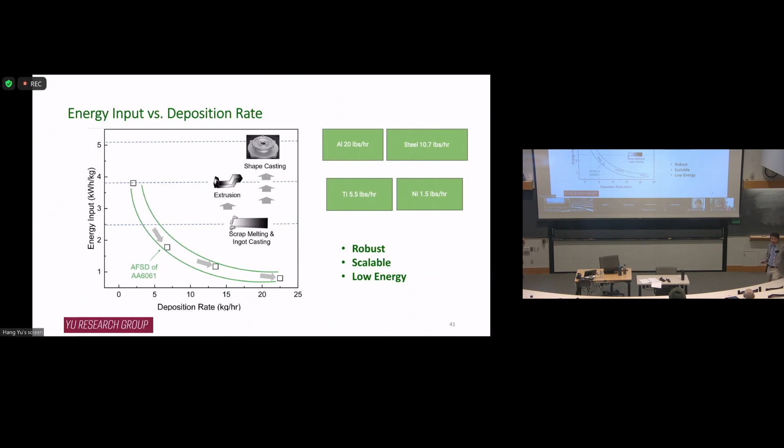So this definitely gives us a low energy path to move forward for a more sustainable future. So again, the last feature, I think the take-home message is: robust technology, I can use feedstock by casting or by waste material, and it's a scalable and relatively low energy process.

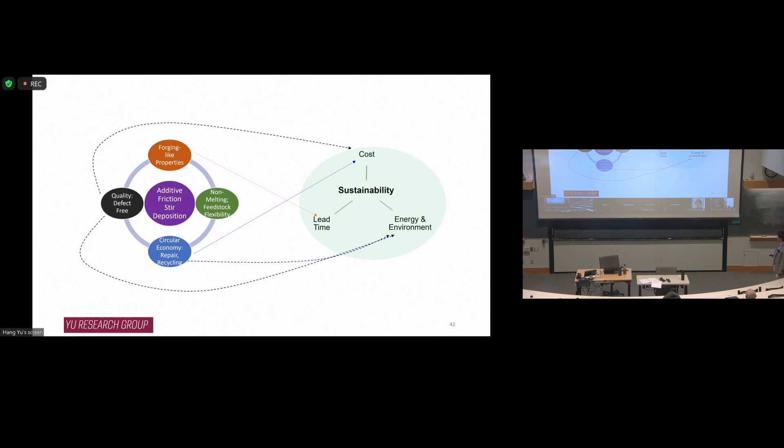So this is like a summary slide. We have talked about four features, and how that links to sustainability. I'm sure all you guys have an answer already. Think about quality, defect-free, you don't have to do post-processing to eliminate the porosity. Lower the cost, energy consumption, forging-like properties, easy to make, also of course lower the cost and lead time. Circular economy applications, recycling, repair, definitely good for cost and energy CO2 emission. And the flexibility of feedstock, non-melting nature, can overall improve the sustainability.